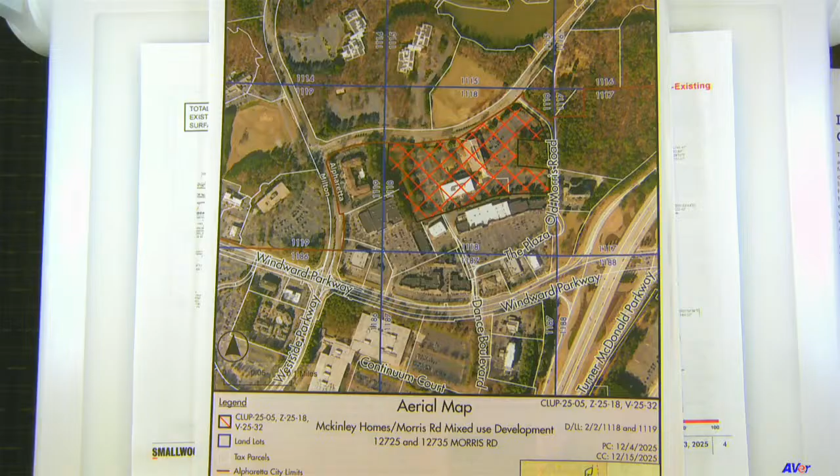Property is developed with 2 4-story office buildings. You can see those here in the aerial, and there are a little over 800 parking spaces surrounding those office buildings. That property is known as Deerfield Point today. The Windward Plaza Shopping Center is located just south of this property. There's an LA Fitness and Courtyard by Marriott Hotel on the west side. City of Milton, the Verizon office properties are located to the north of this location. And then there's another hotel, the Hampton Inn and Suites, and an undeveloped commercial property located to the east.

Because this is the first redevelopment project that we've seen under the Windward LCI, which was adopted in 2004, I wanted to give a little bit of background on that.

We did have that LCI updated in 2024. Again, this was a joint effort between the City of Alpharetta, City of Milton, and the True North CID. That plan envisions this study area shown on this map, which includes both the Alpharetta and Milton portions. What you're seeing is that 7 of our 10 largest employers are located within this district, and for Milton, 10 of their 10 largest employers are located in this district. So it's a pretty important location.

The plan also suggests at this location construction of higher density residential housing integrated with existing and future uses in the area, such as parks, retail, or trails, as the most effective way to attract new residents to this area. This graphic is also from the LCI.

This is the applicant's property, highlighted in yellow. You see there's a green connection that runs through the property and would connect Windward Parkway to Morris Road on the north side. The purpose of that is the City of Milton has a 1-mile loop, depicted here just north of the property, and that loop surrounds an existing lake. I'll talk a little more about a future public park property near that loop in just one moment.

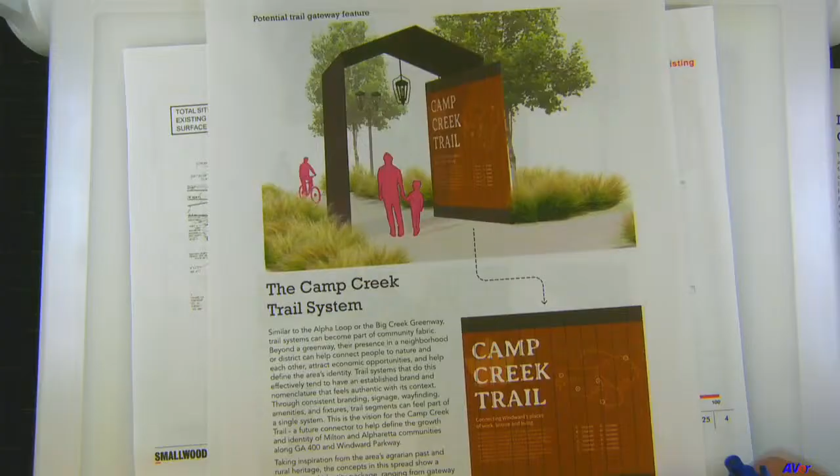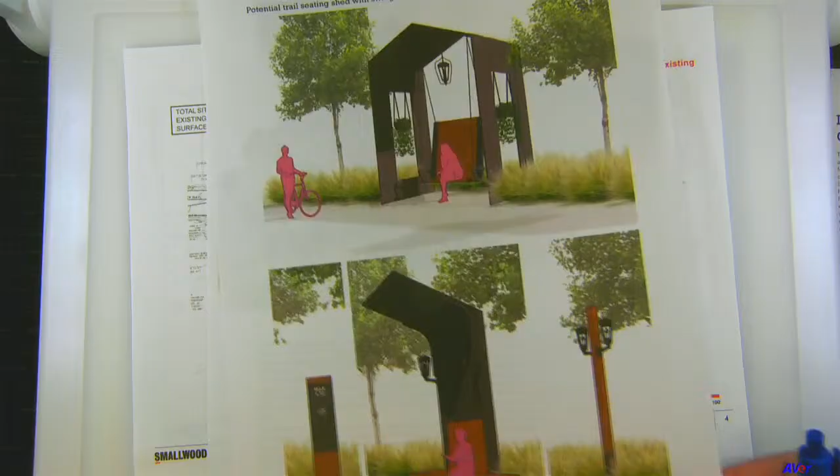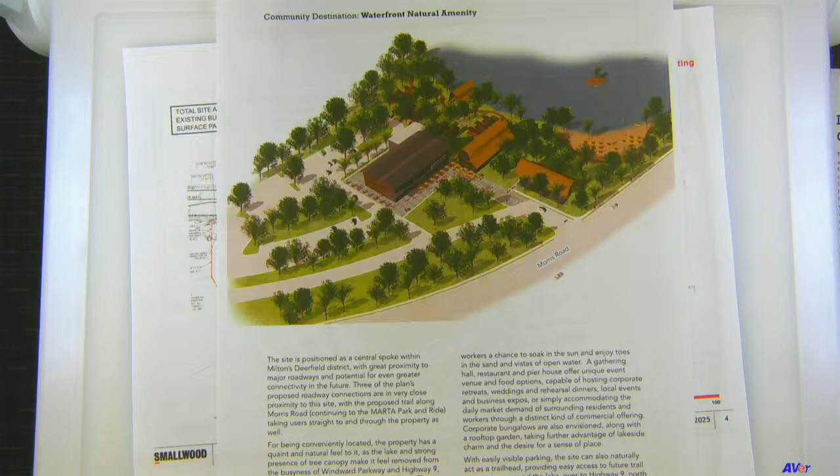As it relates to the Milton project, these are some trail connection and trailhead infrastructure they're showing, with some trail projects that would go through the property - I'll show you those on their site plan in just one second. But this is the large park development envisioned directly north of the applicant's property. This is in the City of Milton, and that site is envisioned to be a public park and event facility with a restaurant, taking advantage of views of that existing lake. I will not belabor the LCI any further beyond that, but if you have any questions, we can certainly come back to those.

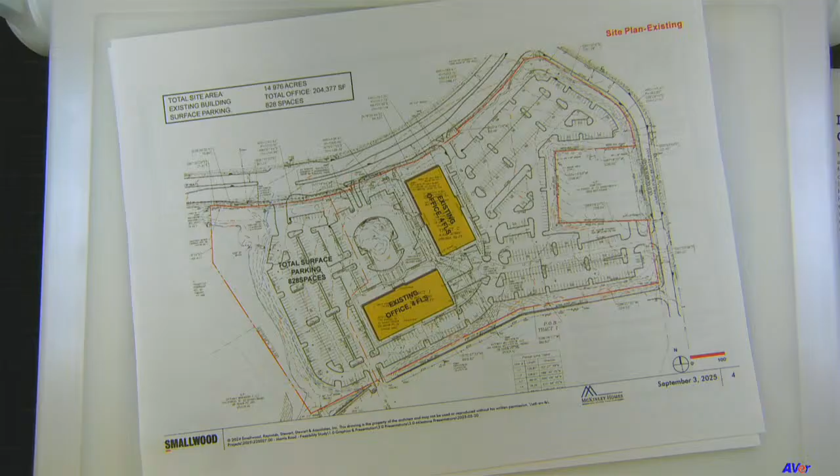As I mentioned, the applicant has two variances. One is to the minimum lot size, to reduce the minimum lot size in the MU district from 25 acres to just under 15 acres. The other is the minimum commercial percentage, which is 10% in MU - they're asking to reduce that to 1.5%. The reason for that is there's an existing shopping center immediately to the south of the property, with over 260,000 square feet of commercial development within that shopping center. So that is the justification for the applicant's variance.

Now I'll get to the site plan for the applicant. This is the site today - Morris and Old Morris on the east side. The shopping center is located just to the south of this development, and you can see the two existing office buildings and surrounding surface parking. What the applicant is proposing is to add a 3-story condominium building with a parking deck in the existing surface parking lot. Basically, the 3 buildings - the 2 existing office buildings to remain, and the new condo building - would frame this central amenity space at their main entrance off of Morris Road.

As I mentioned, there's 5,000 square feet of retail and restaurant uses proposed to occur in the ground floor of the northern office building. The applicant has taken the existing drive aisles within the surface parking lot and added sidewalks along both sides, with sidewalk connections to the 2 office buildings as well as to the future retail in this building. So they've done that all within the existing surface parking lot.

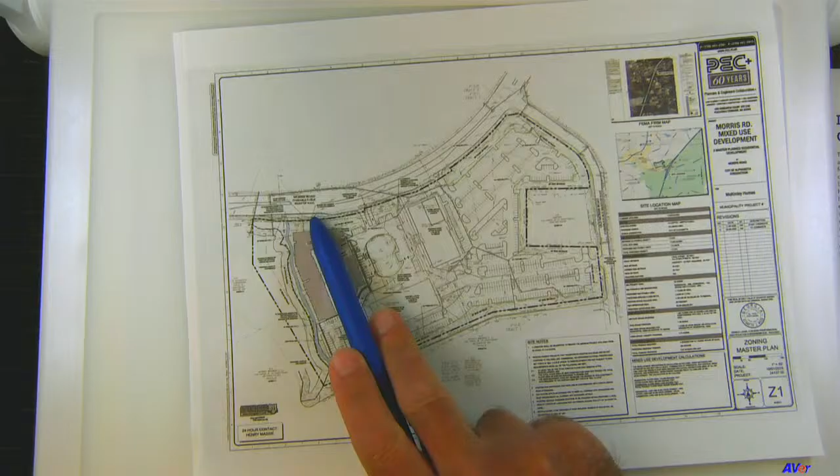The condo building is pulled up to Morris Road. It has about a 35-foot setback, similar to the setback that the existing office building has over here. As I mentioned, there's a 3-level parking deck. Let me switch to this one since it's in color.

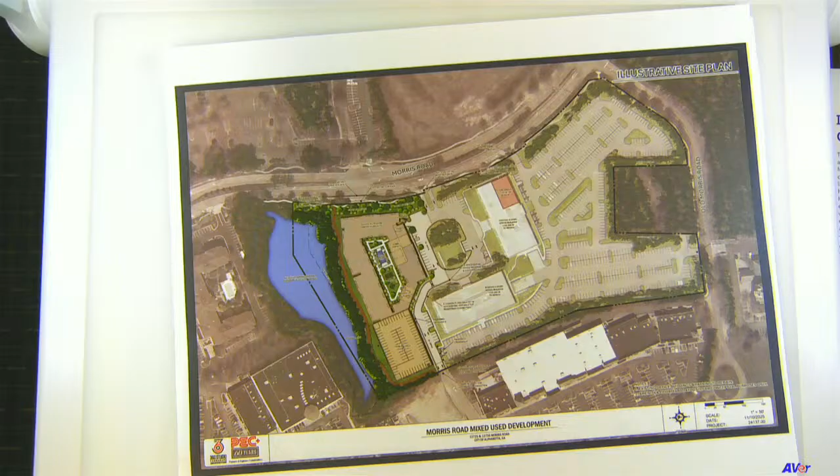There's a 3-level parking deck connected on the south side of the condo building, with 210 spaces in the parking deck. There'll be a balance of about 615 surface parking spaces left, serving all uses on the property.

There is just over 4.25 acres of open space throughout the development. The main part takes advantage of this existing lake on the west side, which is a detention stormwater feature. In addition to the connection through the shopping center to the south, the applicant would continue the vehicular connection out to Morris Road, and also have a multi-use trail running along the west side of the future condo building, adjacent to the existing pond. That pond serves not only this existing office development but the shopping centers as well, and has capacity for this improvement.

The open space on the site includes the multi-use trail, pool and amenity areas, courtyards, lobby and amenity area, central amenity area, yards, balconies, landscaped areas, entry features, and outdoor seating. There are existing trees along the perimeter of the property, which will remain. The only trees that would be removed are existing planted trees within the former surface parking lot, and some trees along the section where the multi-use trail would be installed.

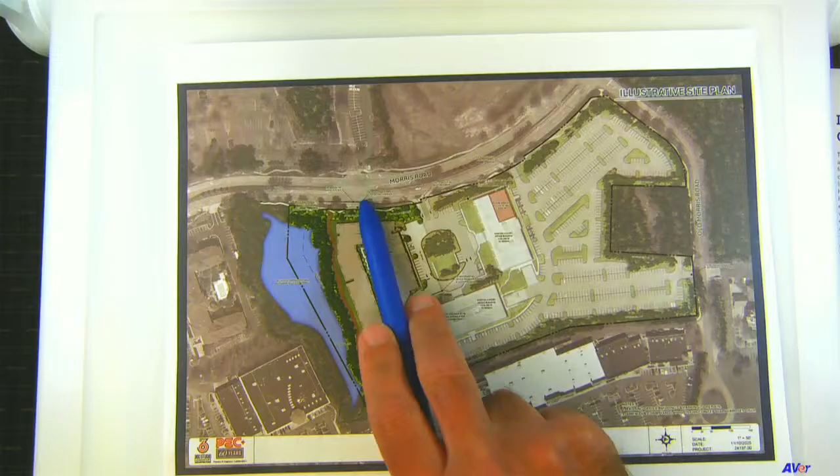Except there is an existing driveway right here, and that one will be closed off. So the remaining access to the site will be 2 existing curb cuts off of Morris Road, as well as an existing curb cut on Old Morris Road. You will also be able to access this property through the drive aisle from the shopping center to the south.

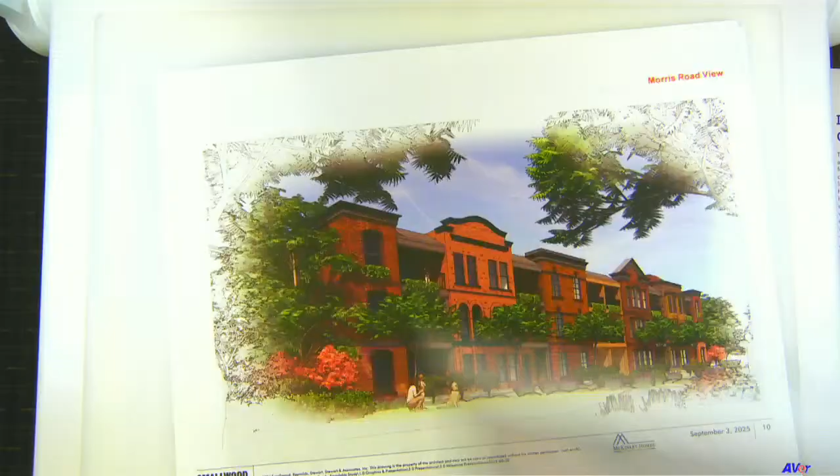To give you a little flavor of the architecture the applicant was proposing: instead of doing one large condo building that looked like one mass, they were trying to divide it up so it looked like individual units. You can see that here, and here.

Looking at the review criteria for the comprehensive land use plan amendment, rezoning, and variance, we believe the proposal is consistent with the vision in the Windward LCI, which looks at this property as part of a town center development, integrating existing and future uses into a mixed-use development by adding higher density housing. We also looked at land use, housing, and economic development strategies in the current comprehensive plan, and believe it's consistent with strategies that encourage mixed-use patterns creating activity nodes in appropriate areas near or within existing suburban office developments.

One strategy talks about diversifying housing options and expanding missing middle housing choices. Condominiums are always one of those that we push for but rarely get. There's also the economic development strategy of investing in office districts with amenities that attract highly skilled employees. I believe citywide we're at about 23% office vacancy. Originally, we studied this area because of the change in office vacancy from about 5% in 2016 to over 20% in 2023.

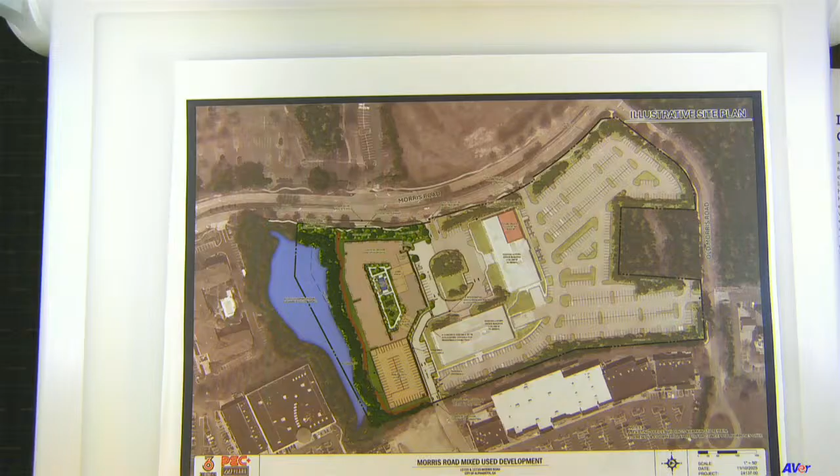Thank you, Mr. Woodman. Do we have any questions for Mr. Woodman at this time?

Councilwoman Reeves: The detention pond that currently exists - is there any kind of water feature in there that keeps the water moving? Because with people living there, I would think we would not want standing water. Great question, I do not believe that there is. We did look at that, and there is a condition of zoning here that would require them to add a fountain to that stormwater feature. Thank you.

Any other questions for Mr. Woodman on this item? Councilwoman Reeves?

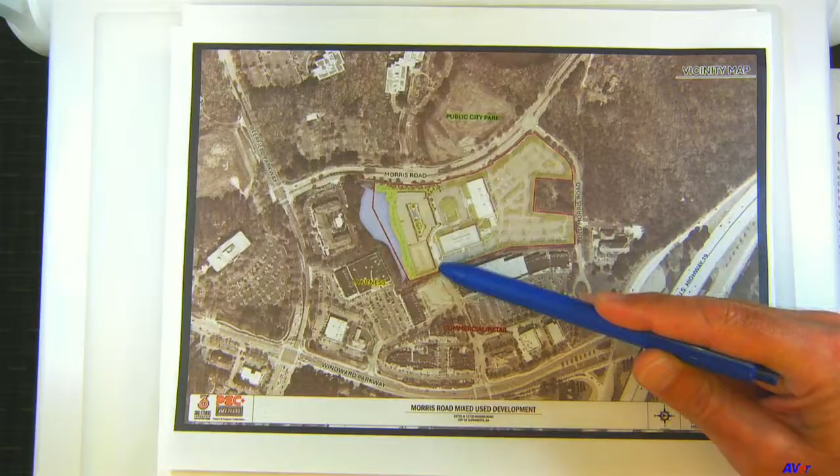So the road that comes from Windward Plaza, from the shopping center over - will that be a regulation-size road that anybody can access that development from? I believe you'd be talking about this one. So it is a private drive today. We did ask the developer to reach out to the adjacent property. If this shopping center were to ever redevelop in the future, we would look to get right-of-way for a local street section to come through here. Right now it was developed as a drive aisle, basically. There are sidewalks - the applicant has added sidewalks within their drive aisles. So there would be a sidewalk connection as well as a vehicular connection, but I do not believe it meets our full local street standard as it sits today.

Thank you. Any other council members have questions? Thank you, Mr. Woodman.

Would the applicant like to come forward at this time?

Awesome, thank you so much. Kenneth Wood, 350 Research Court, Peachtree Corners, Georgia. Thank you so much for letting us review the mixed-use proposal for this.

This is a project I've actually looked at for quite a few years in a couple of different capacities, kind of this area, and finally seeing some different movement. It's exciting to see the ideas for a mixture of uses. I feel like I've worked on a lot of projects south of Charlotte where we're taking existing office, preserving the office, and just adding more residential to make it mixed use.

So it's exciting to see in this area also kind of some of the same ideas. McKinley Homes purchased the property for office. They intend to keep it as office. They have purchased quite a few offices within the Atlanta metro area. They also own the office over toward Peachtree Corners as well, looking at some similar ideas.

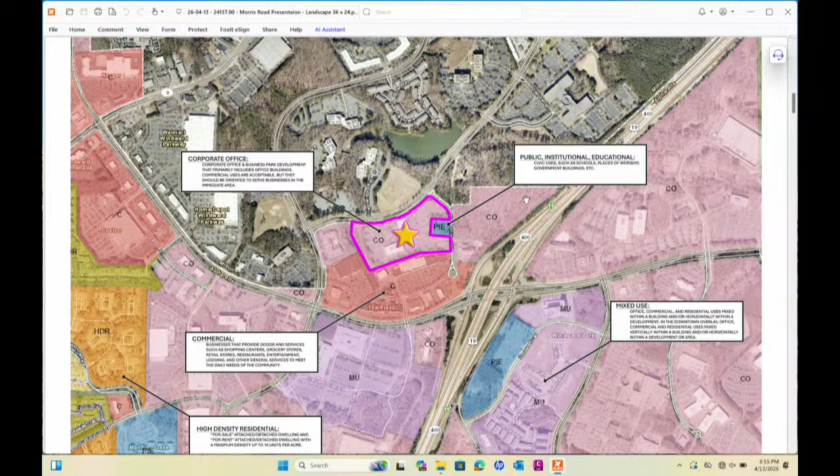Then, as we went through the LCI, which Michael mentioned, you're so walkable to the commercial area. You have your office there and so much commercial nearby, and you're even really close—if you wanted to go down to Sushi Nami, it's not very far, you can cross over the road and get down there as well. So you have a lot of different options for the site.

When I saw it and started thinking about the plan, Smallwood Reynolds is the architect. They came out with the building and we fit it together on this plan to try to work it so you would frame all three buildings. You had the two office buildings and this would frame that last building. That's why we really wanted to make sure we were keeping this courtyard.

When you drive in, there are huge oak trees—if you've been out there, they're pretty substantial. The sidewalk meanders all the way down through here. It's a really cool setting, so we really wanted to preserve that courtyard.

So we mimicked it on the other side—mimicked it with the way you come in, you can have kind of that business center as part of the condominium, then our pool on the inside, and the walking trail around it, with covered parking here on the side. This would all be landscaped, also landscaped on the edges, but we have our sidewalks on each side as you're going through.

If you look down a couple other places, these are our access points. And the site plan that's our most current, you can see it here. We changed the head-in parking on this access to be parallel, all the way up to the front of the office, so if you're coming from the south it felt more like a street coming in.

But you can also leave over here and come to Old Morris. A lot of people today come out of here, even with this one, because it's crossing four lanes of traffic—it's not the most feel-good exit. That was the reason we decided to put it over here, take this one out, and focus all the traffic on the other direction. That was the reason for the plan, the way you're out there driving through.

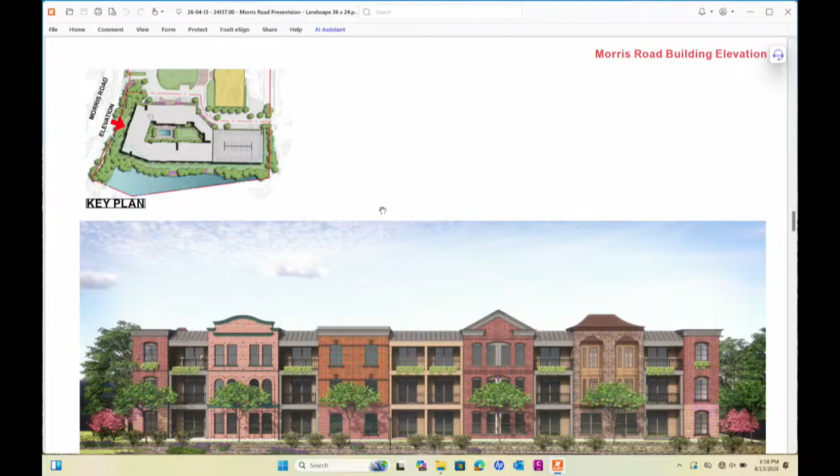This is a look at what that landscape area looks like with the 10-foot trail coming down and connecting back into the road. And then these are the architectural elements Michael went through, but the idea Smallwood created was really trying to make it look like, instead of one continuous building, like a townhome and then a townhome, as you're looking through with larger decks, much larger than you'd see at an apartment building since it's a condominium. Also the reason for only 110 units.

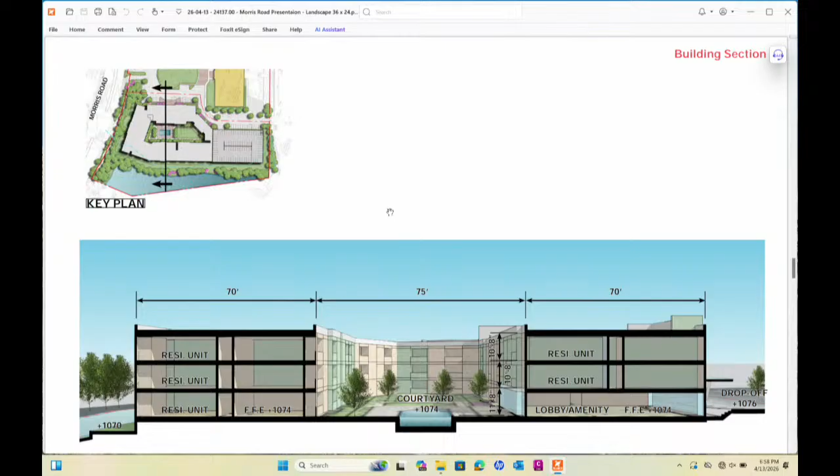This kind of gives you an idea. The courtyard is pretty flat throughout, and this is the way we have the residential units and how the lobby and amenities sit as part of the two. You can see it from over here by the lake and then up here. It's only about 6 feet across, and that's the beauty of redeveloping in this kind of setting.

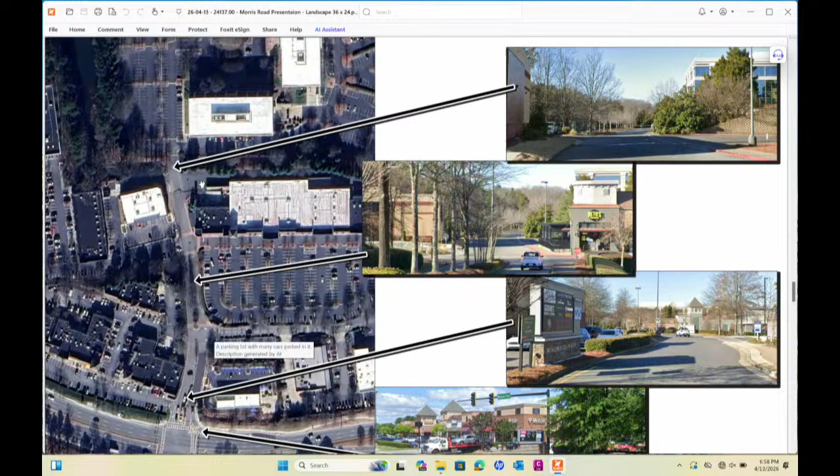Kind of last couple of things. These are the photos we took of the way this feels coming into the site. You have the divided median that takes you about halfway through, and then the last part as you're coming back up and getting directly into the office building, into the backside. This is what the backside feels like. So this sidewalk that's here, we'd be extending, adding the trail over on this side, and coming into the site from that direction.

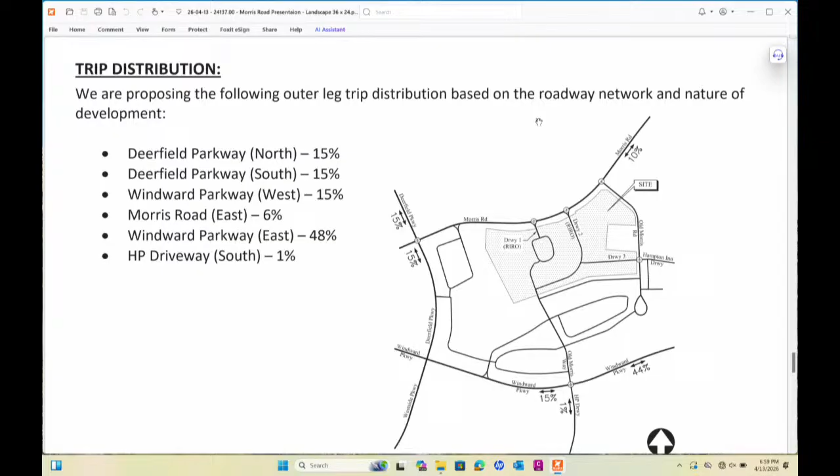We did have a traffic study, as Michael suggested. We did not see any impacts, and we made sure to go through a full traffic study to make sure we were able to circulate throughout the area as best as possible. We also had to take into consideration what was coming across the street. That was one of the biggest things. It's always hard to talk about, I don't even know if it's public yet, but we know what's coming across the street. So we had to get a hold of that plan and look at that to make sure we're looking at the traffic in the right way, not just being short-sighted without taking that into account.

And then lastly, same as Planning Commission with their approval, we're good with all of the conditions that we went through with this, the design conditions as well as the other conditions placed on the property.

In closing, running back through, when we looked at the plan for the LCI study, we felt like this is what made the most sense. McKinley's has a condo down in Midtown, they have a condo in Peachtree Corners. This is one where, how are they able to do it? Well, they own the property. The office is what's generating it, so it's basically free land for them to build the residential on, as well as the 3 stories, and not pushing the stories up to 5 from a construction cost standpoint is also very helpful.

A couple of comments that came up at Planning Commission I want to mention. Around 4,500 to 4,900 is the anticipated HOA on a yearly basis. Their goal is to hit into the upper 3s, into the higher 4s, so they can hit a price point not really seen in a lot of areas with these condos. That's the driving factor for being able to execute a high-level project while fitting a condominium in with an office development of that sort.

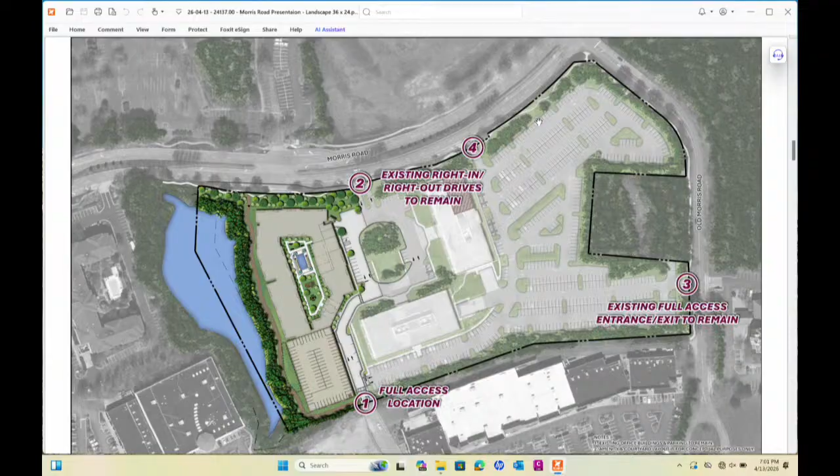But with that, I can take any questions. Love any feedback. Do we have any questions? Councilman Dorito? Thank you, Mr. Wood.

I like the project, so I don't want you to think my questions are against it. No, sure. I just want to get some clarity on some things.

The parking deck, 210 spaces, obviously removing parking. How many spaces were removed, do you know that offhand? How many spaces were taken out in that acreage where the condominium building and parking deck would be built? Oh, I had that. Hold on, let me see.

I was looking for that, but I didn't. Yeah, we have a full survey. Michael, do you have that sheet? Let me ask you a different way.

Does it meet the parking requirements with the removal of those spaces, and within the parking deck to accommodate the number of spaces required for the condominiums, plus Mr. Woodman alluded to the deck also being shared with the office, or no?

On the ground floor there are some spaces available. We don't think they'll be utilized, but in terms of the mixed parking ordinance we needed to make it available. We have surface parking right here in front, and parallel parking here—plenty of parking for the office, which actually funnels closer to the office. So the deck is really to support the residential.

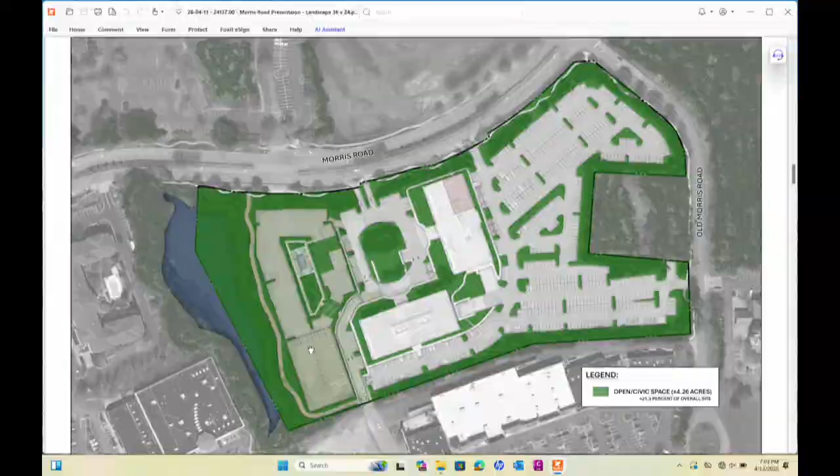Just one more question—I know you made reference to McKinley Homes purchasing the property with the office buildings on it. When I look at McKinley Homes, they're a housing developer, not an office developer. I'm not saying they wouldn't retain these office buildings, but do we know for a fact they have no interest in removing them?

So Jen, the owner of McKinley, runs McKinley Homes, but personally works on condos. He'll build office, he'll do industrial—what he really pushes is urban, and he really likes urban townhomes.

I should add, I read that McKinley Homes actually looks for this type of development to build housing around. That's right. He does kind of a random project over in Johns Creek right now.

We have a site that we zoned, and it's literally $1 million homes. And right here he has another site where he's wanting to do pickleball courts that you come and rent. He's well-funded and always comes up with different ideas.

And I can definitely see he's liking these kind of urban environments. I think that office building to the south, the big white thing you see there, isn't fully utilized right now—I think that used to be the hhgregg or whatever that electronics store was.